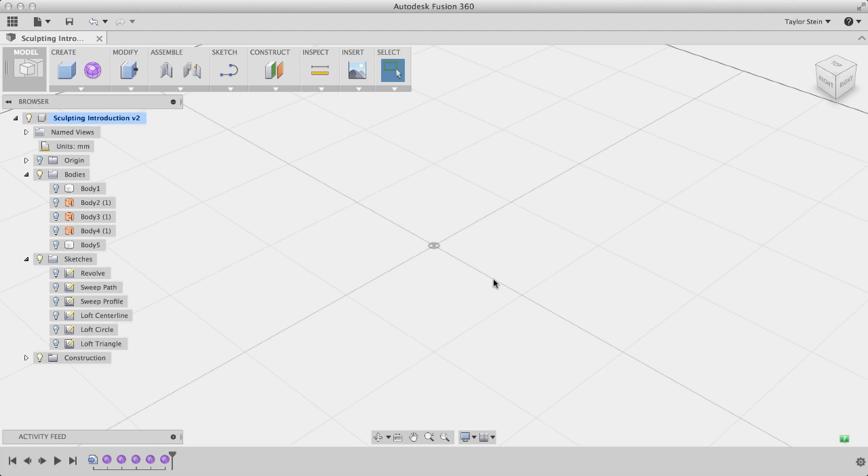So let's get started by creating a blank design by navigating to the File menu and selecting New Design. And we'll start by inserting our canvas. Under Insert, we'll select Attach Canvas, and we'll select this face.

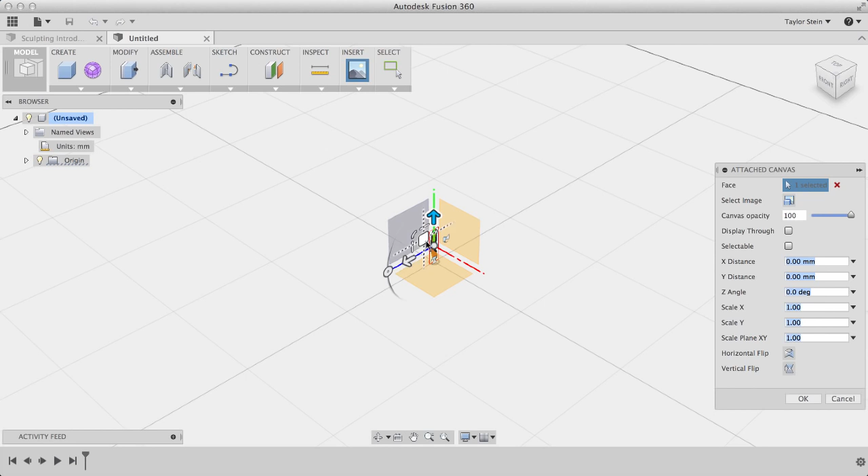In the dialog window, we'll select our image, this utility knife, and click Open. You'll see this rotated 90 degrees, so I'll use this rotate manipulator to position it properly. I'll lock it in at 90. I'll scale it up just so it's a bit easier to see using the scale manipulator.

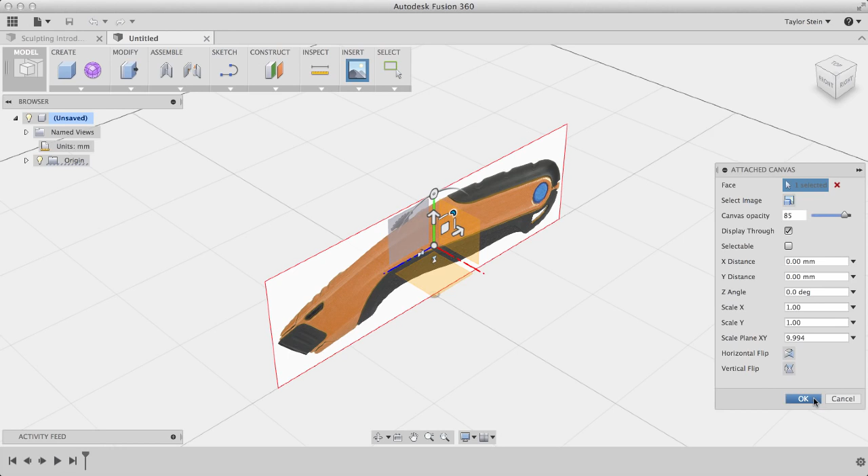Next, I'll drop the opacity down to 85. And I'll check the box for display through so that when we're sculpting our T-spline form, we can always see the canvas. I'll click OK, and you'll see that in the browser, we now have our canvas in the canvas folder.

I can right-click on our canvas and select Calibrate. I'll look at our canvas from the right-hand side by clicking on the View Cube, and I'll click 2 points to calibrate our image. With my 2 points selected, I'll enter in the value. In this case, it's 180 millimeters, and I hit Enter, and my image is calibrated properly.

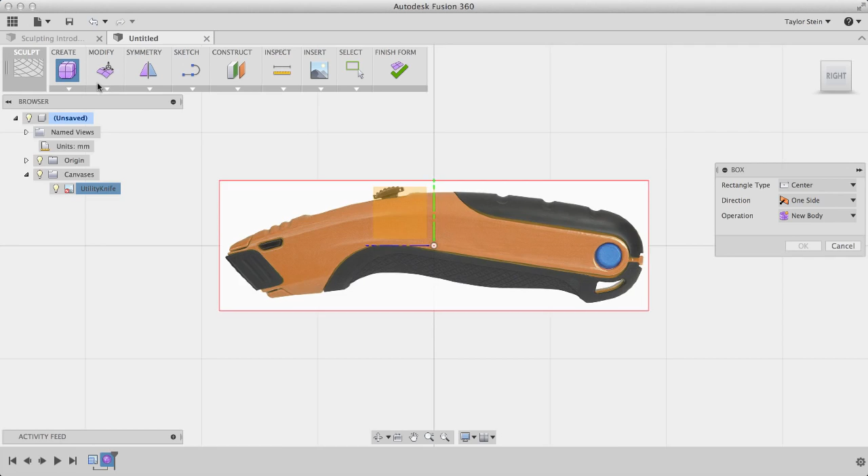Next, I'll create a form, and specifically we'll create a box. I'll place my box on this plane right here, place its center point on the origin, and draw its 2D profile.

I'll set the length equal to 175 millimeters, its width equal to 35 millimeters, and its height equal to 25 millimeters.

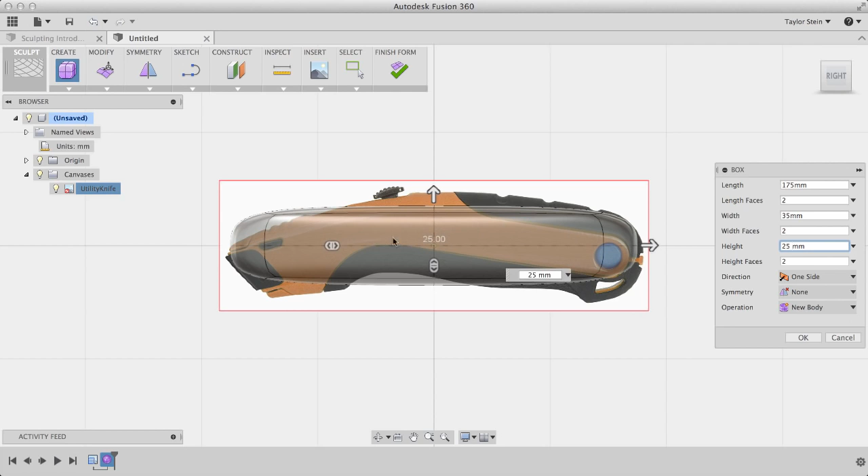As you can see, there's more detail running around the length of the knife, so I need to add more faces in this direction. I'll set the length faces from 2 to 5, and now we have more faces going that way. Lastly, I know my utility knife needs to be symmetrical, so under Symmetry, I'll change it from None to Mirror, and apply Height Symmetry. This green line now indicates the symmetry that exists in my T-spline form.

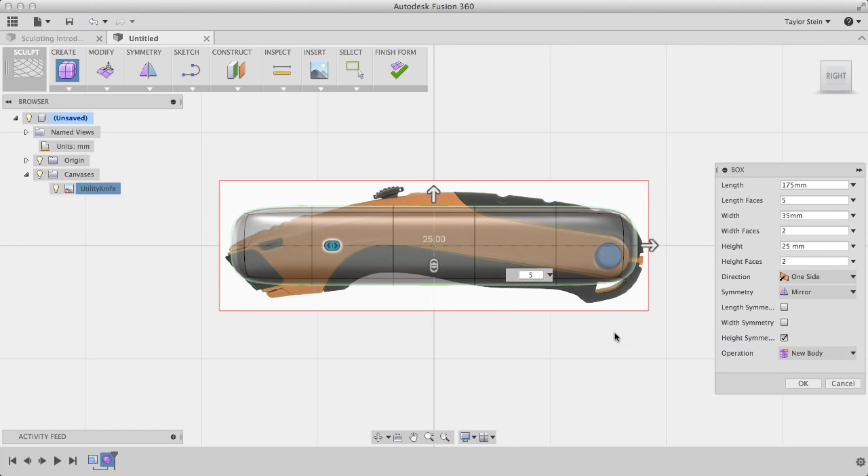Our T-spline primitive is now in place, but we need to edit its geometry to better match our reference picture. To do this, I'll start the Edit Form tool, and I'll start by window selecting these faces right here by clicking and holding, and dragging left to right to draw a window around them.

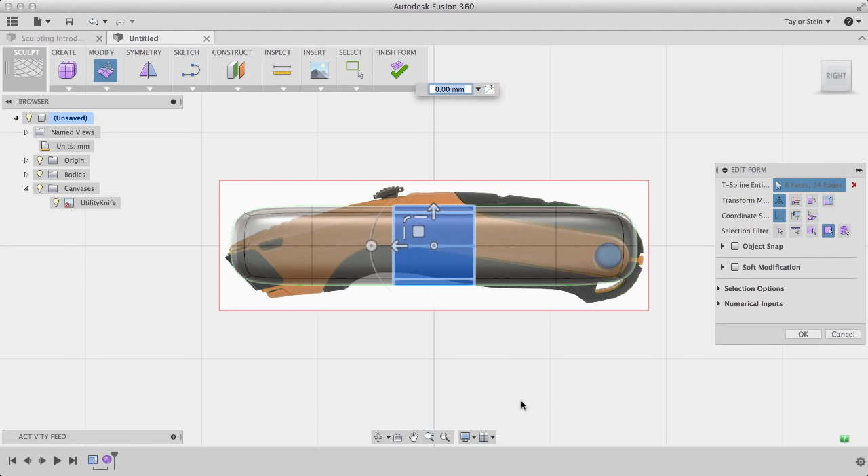I can use the planar manipulator to move these up to match the top profile, and I'll window select the bottom face and rotate it and position it properly.

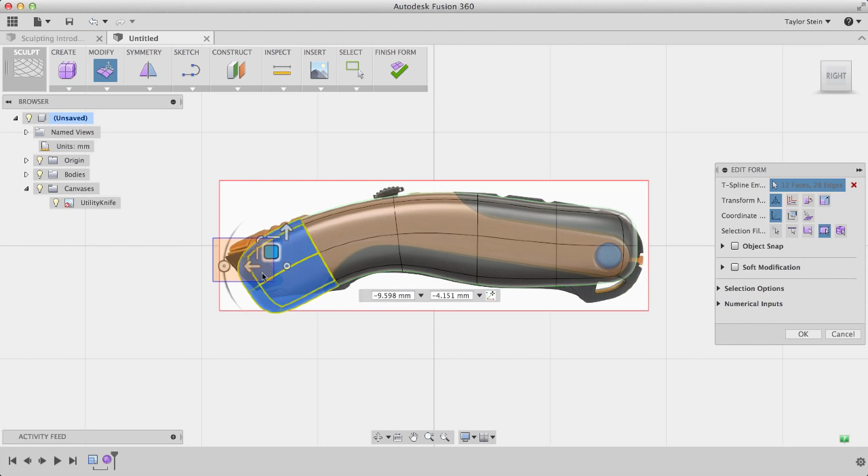Using the same method, I can freehand manipulate my form until it's in place. I can move individual faces or edges, whatever I want. So we'll manipulate this form until we roughly approximate the reference image behind it.

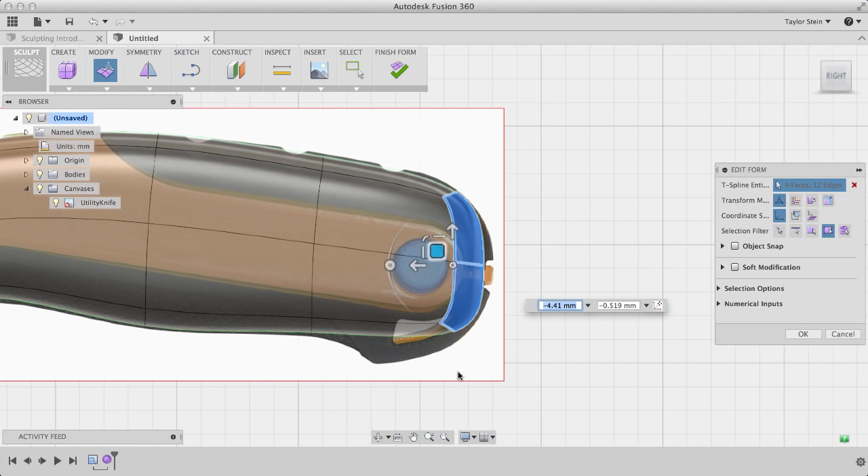By using the planar manipulator and the single rotate manipulator, I know that I'm changing my geometry in a plane, but I'm not changing it in and out of the screen. In doing this, I'm able to keep a really nice and consistent form while just worrying about the directions that I need to worry about.

For finer details, I'll select individual edges, and I'll pull this down, and our form is really starting to take shape.

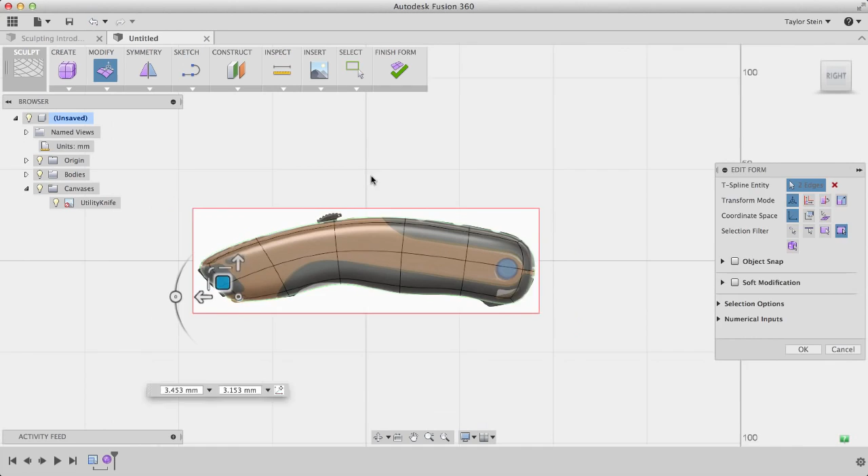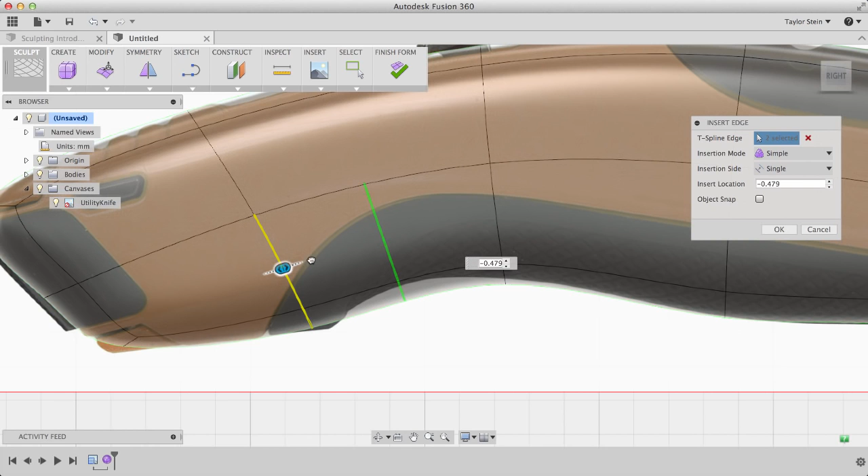To add more detail, we need to insert an edge into our T-spline form. Holding Shift, I'll select these two edges, and under Modify, I'll choose Insert Edge. Here I'll position the edge to the right-hand side, right about in the middle, so negative 0.5.

I'll click OK, and our edge will be inserted. I'll do the same thing to add an additional edge in the back down here. Under Modify, I'll choose Insert Edge, and drag it to the right about in the middle, negative 0.5. I could enter it into the dialog window if I want, and I'll click OK.

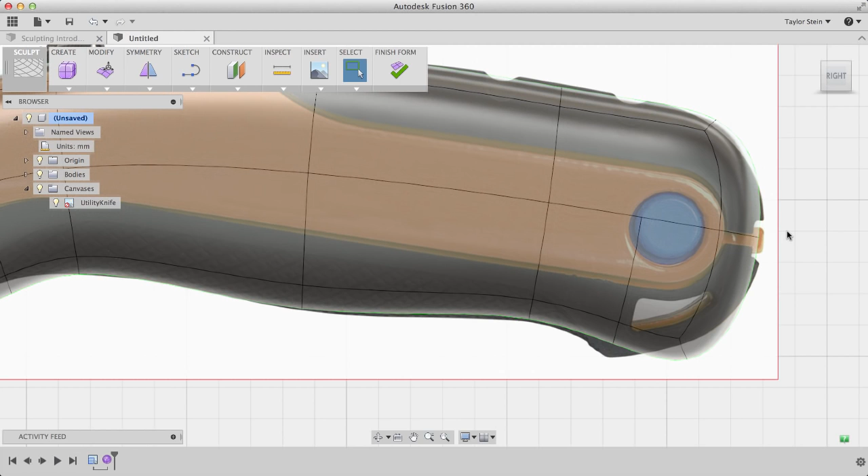Next, using the Edit Form tool and the same planar and rotate manipulators, I'll position my geometry to closely match the reference image behind it. As you can see, my form has changed a little bit, so I need to do some pressing and pulling to get it into place, and you can spend as much or as little time as you want on this.

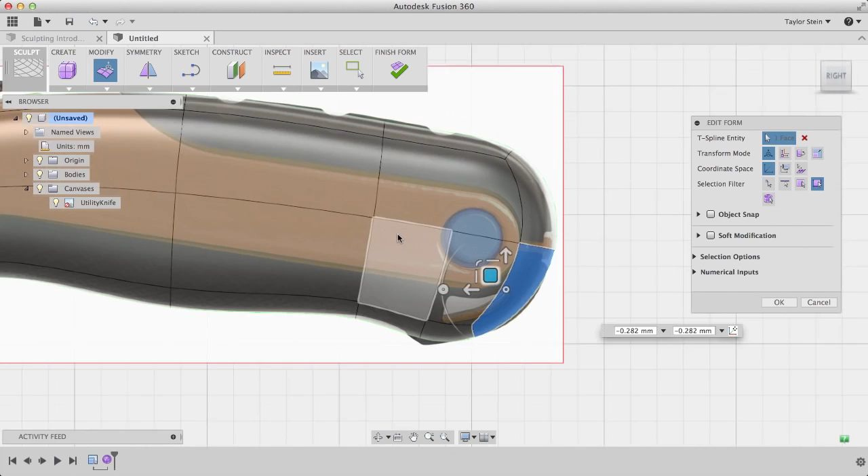I'm going to work my way around the form, grabbing edges and making sure that it lines up with my reference image. If it's not perfect, that's okay. I'm going to keep working my way around, grabbing edges and moving them until I match the reference image behind it.

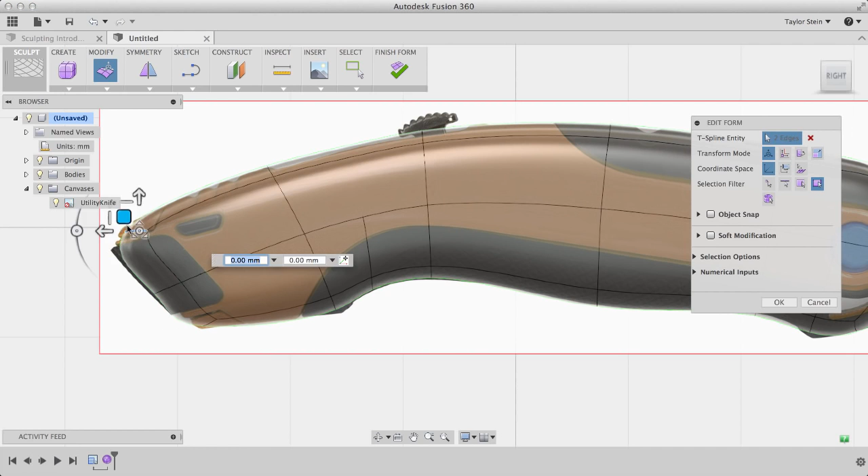To add really precise detail, we're going to use a new command, the Insert Point command. Under Modify, I'll choose Insert Point. I'll click once, and when I click again at this bottom edge at the midpoint, I create an edge from midpoint to midpoint. I'll click OK, and my edge is inserted.

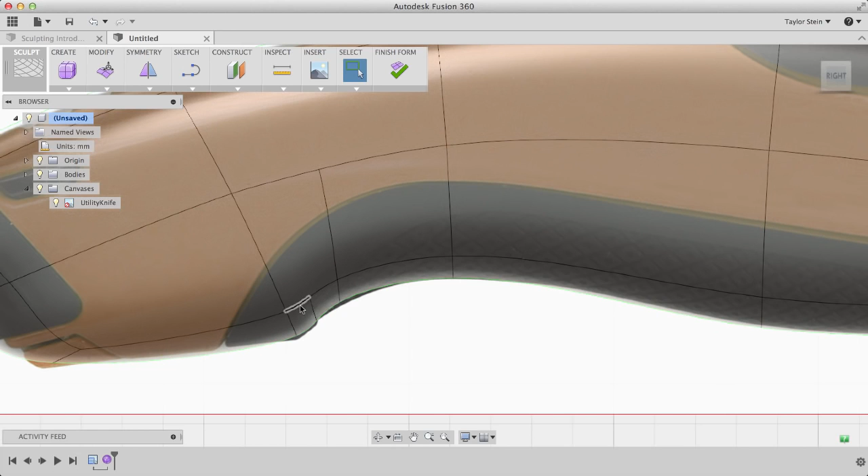I'll do the same back here to add some detail to the back of the utility knife. Again, with my new geometry, I'll go back to Edit Form and press and pull on my surface until I get the result that I want.

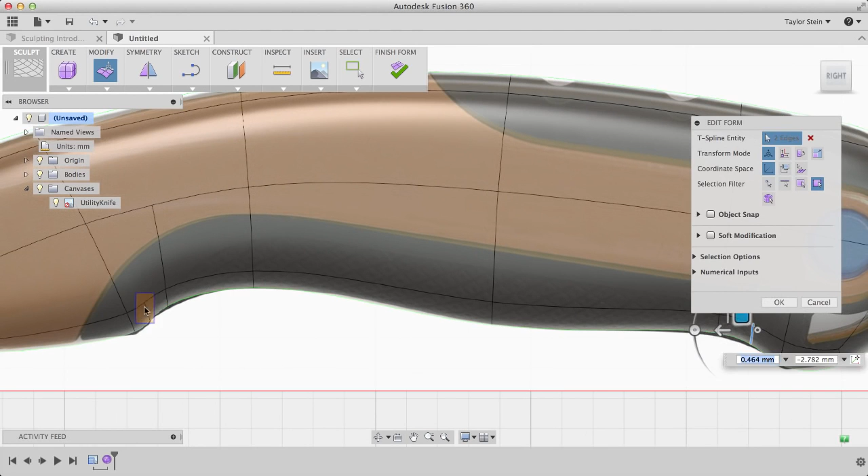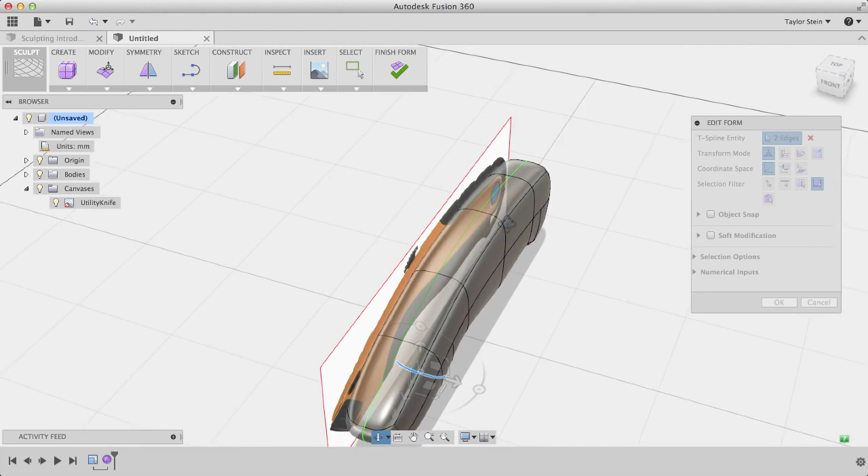I can also view my utility knife from any view I want to sculpt in any details I want along the side. There you have it. That's how you sculpt a T-spline form based on a reference image in Fusion 360.